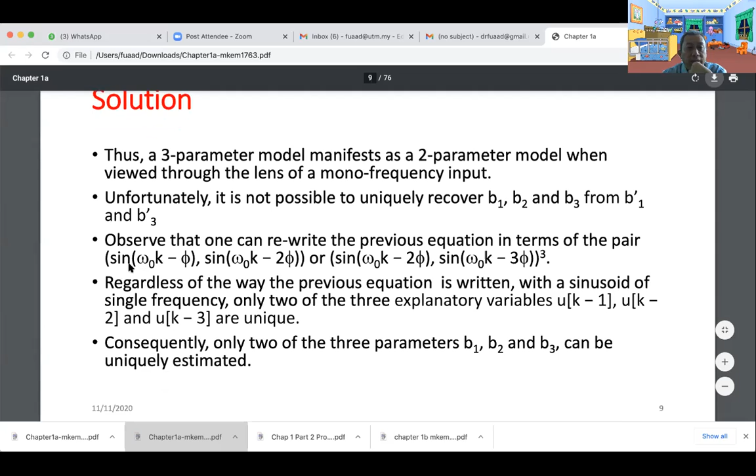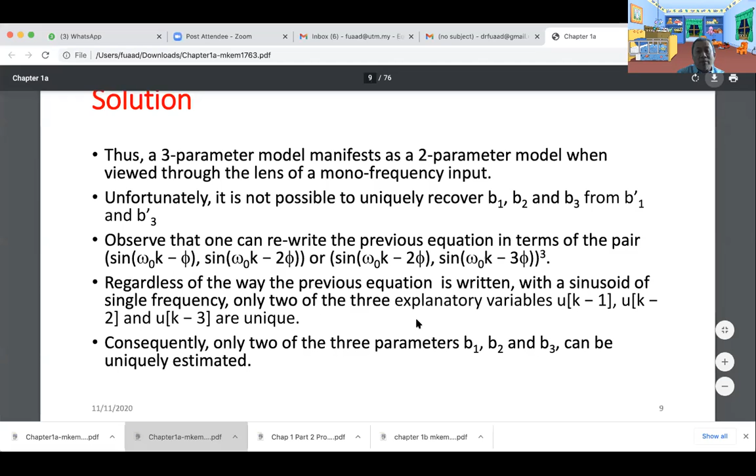So we can rewrite the equation in terms of sine(omega naught k) and sine(omega naught (k-2)), or we can replace it with sine(omega naught (k-2)) and sine(omega naught (k-3)). Either one can do, because we can manipulate the mathematical equations of the system and then estimate the parameters B1, B2, and B3. For further details, you can refer to example 2 in book chapter 1, part 2.

So I would like to draw your attention to one of the important issues in system ID. We're still in chapter 1, which is the signal to noise ratio. SNR is very important for the user, for the designer, for the student, research student, when they are doing a real experiment to collect data.

So the formula for SNR is given by variance of signals divided by variance of noise. It is the relative contribution of deterministic excitations and random variations, quantified as a single formula, SNR. The term signal here refers to the true response that you get from the system, and having a good SNR is critical and very vital, because it will affect the reliable parameters that we're going to estimate, and particularly the estimation method that we are going to apply.

So it's a very simple formula, whether it is high or low. Since this is a ratio between the signal and noise, the numerator, the upper part, must be as high as possible, and the lower part must be as low as possible. So when you get 10 volts on the signal and the noise is 1 volt, 10 divided by 1, the signal to noise ratio is 10, so it's considered very good.

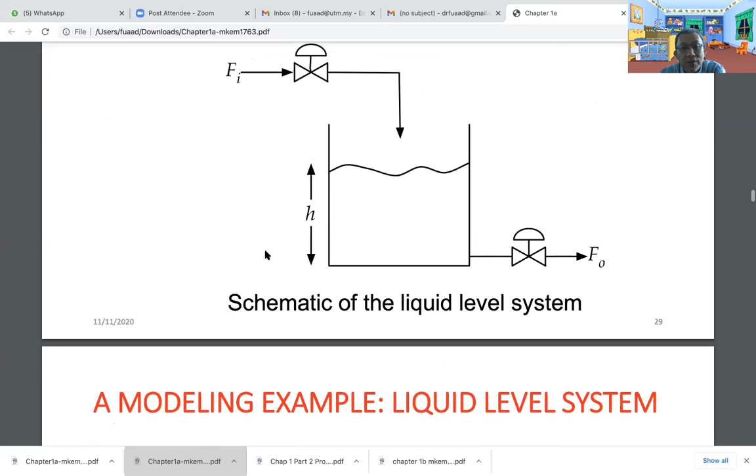Okay. So from this diagram, okay, we totally know that this is a simple first order system, because it's a single tank. If the system is two tanks or coupled tanks, then it is a second order system. Okay, this is what we call prior knowledge. Right. So in this modeling example of the liquid level system, we will see the physical process. We will see data generation. We will see data visualization and preliminary analysis.

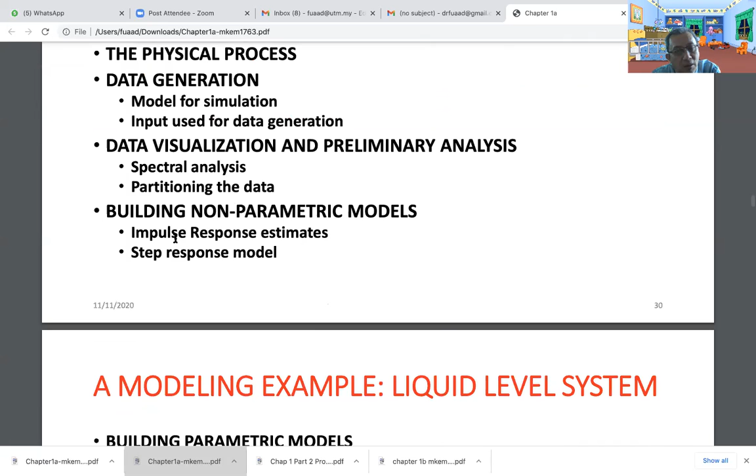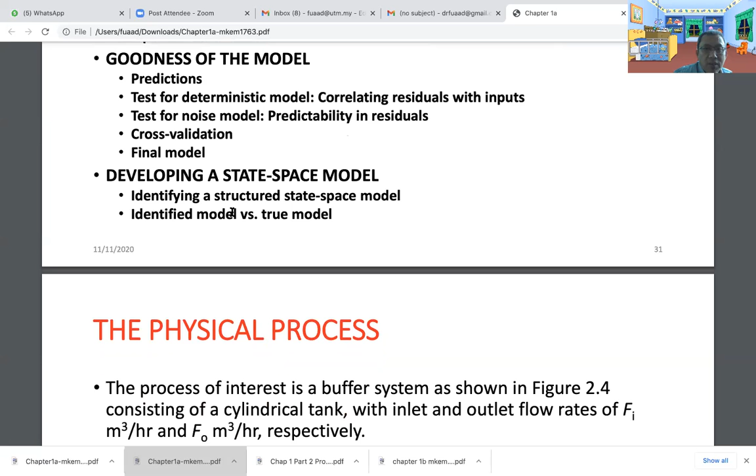We will see how to build non-parametric models, and we will see how to build parametric models. In this case, we are using the output error and the equation error. And then we are going to see how good the model is. We call it the goodness of the models. We're going to see the predictions, deterministic tests, noise model tests, and so on. And then try to see another model besides the transfer function, which is a state space model.

So you can see here, this is the physical process, okay, of interest. We have a buffer system shown in figure 2.4 here, okay. So Fi is the input flow rate, in meters cubed per hour, and the output here is in meters cubed per hour as well. So the objective is to build a model that explains changes in level H with respect to changes in inlet flow rate Fi. So the end use of this model could be in simulation, control, and monitoring of the liquid level system.

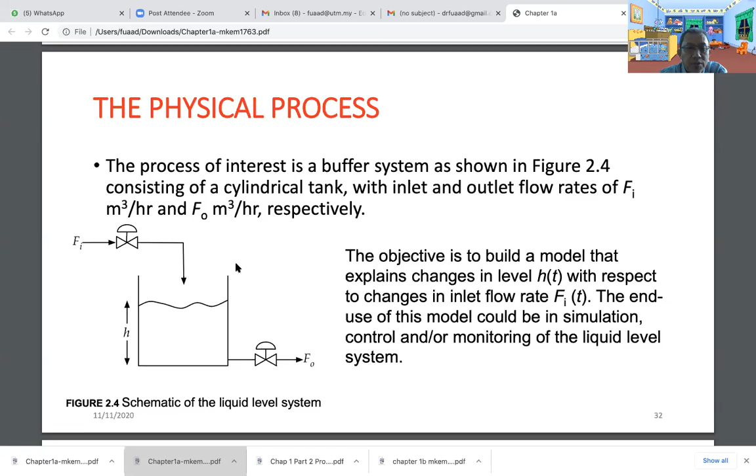So how to generate data? In order to generate data, we have two types. One is via experiment. The second one is by simulation. So first of all, we have to find the first principles model, which is by derivation. So for a single tank, the deterministic first principles model of the liquid level system based on conservation of mass is given by dH/dt, where we differentiate the height of the liquid, plus 1 over Ac multiplied by Cv square root of H(t), equal to 1 over Ac multiplied by Fi.

Okay, with the assumptions. Number one, incompressible fluid. And number two, the outlet flow rate being proportional to the square root of the pressure head, which is the valve equation, F naught equal to Cv square root of H(t). So what is Cv? Cv is the valve coefficient. Every valve has its coefficient, so you have to look at the spec of the hardware. The valve coefficient of the outlet is Cv, and Ac is the cross-section area of the cylindrical tank.

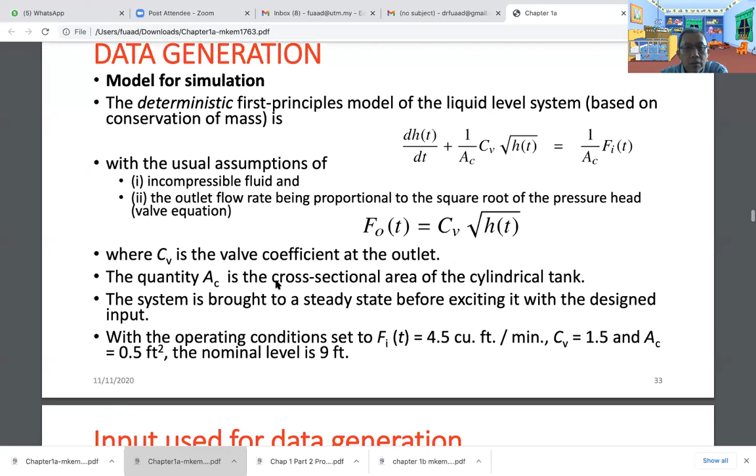So the system is brought to a steady state before exciting it with the design input. The operating condition is set to Fi equal to 4.5 cubic feet per minute, CV is 1.5, and AC is 0.5 square feet. So the nominal level is equal to 9 feet.

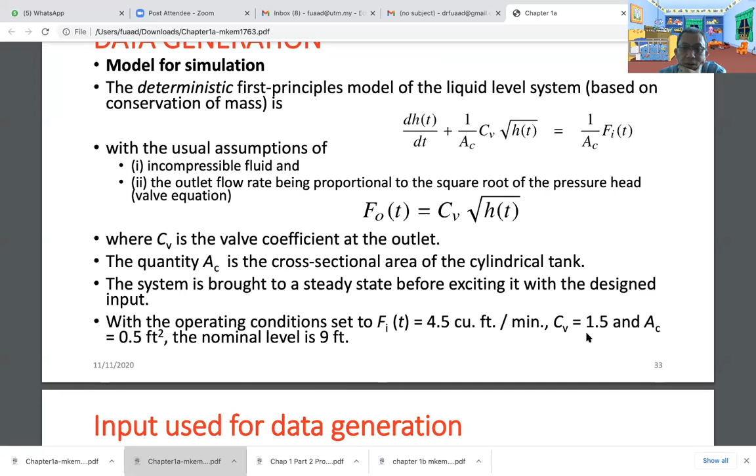You can see that CV here is the valve coefficient. This one we will get from the spec of the valve that we buy. Right, so that is the hardware, the process. Okay, so now is the input that we use for data generation.

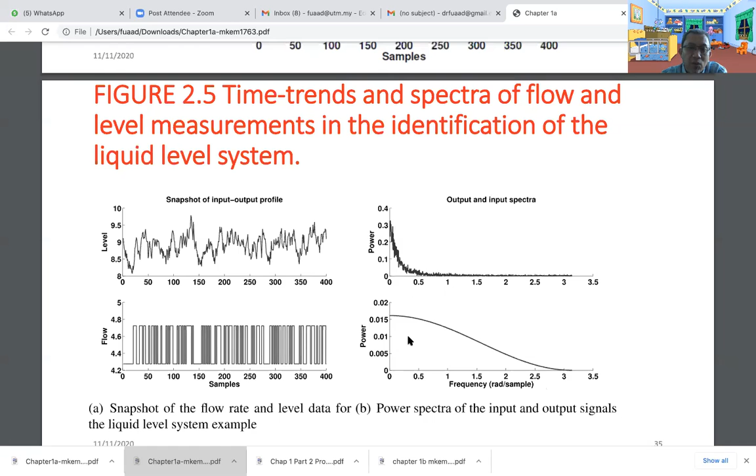So the response of the sampled data, from the equipment that we're going to sample, which we call a ZOH, zero-order hold, or process sampler, is obtained by numerically integrating the nonlinear ordinary differential equation here. So we manipulate this equation: dH/dt plus 1 over AC times CV square root of H(t) equals 1 over AC times Fi.

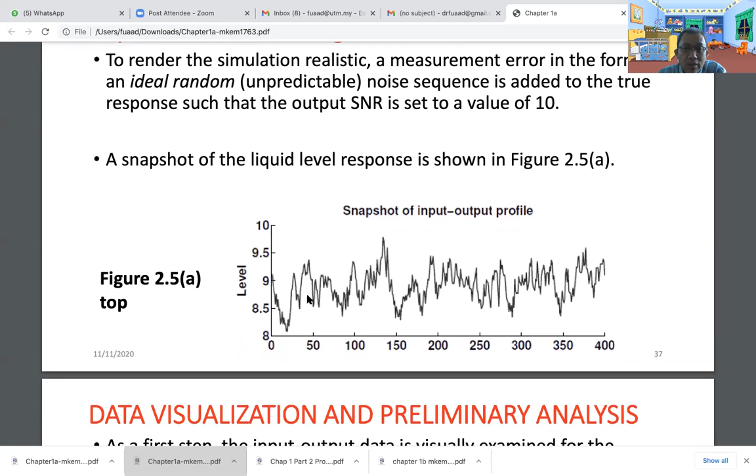And to make the system realistic in simulation, we add some unpredictable noise to the system. To render the simulation realistic, a measurement error in the form of an ideal random or unpredictable noise sequence is added to the true response with the SNR set to 10. So we can see the snapshot here, similar to the figure that I showed before.

So the input-output data is visually examined for the presence of any drift, outliers, and so on. We can see here there is no drift. Drift is related to the age of the equipment that we use. If the equipment is too old, it might contribute to drift in the data, which must be removed, must be deleted from the data.

And outliers are something similar to drift: the data taken is not logical, it's out of the expected tolerance that we allow. So we must delete this data as well. So at the end of the day, we get this.

You can see that some data pre-processing is needed, because this is the input and this is the output. In the output, we added some random, unpredictable signals. So we need some data pre-processing.

So from the data, you can see that steady state cannot be determined experimentally before introducing changes to the input, okay? Because such performance is based on the alternative method, which is using the average reading as the nominal operating point. So therefore, we apply a simple mean centering operation of the input and output data to generate the required deviation variables.

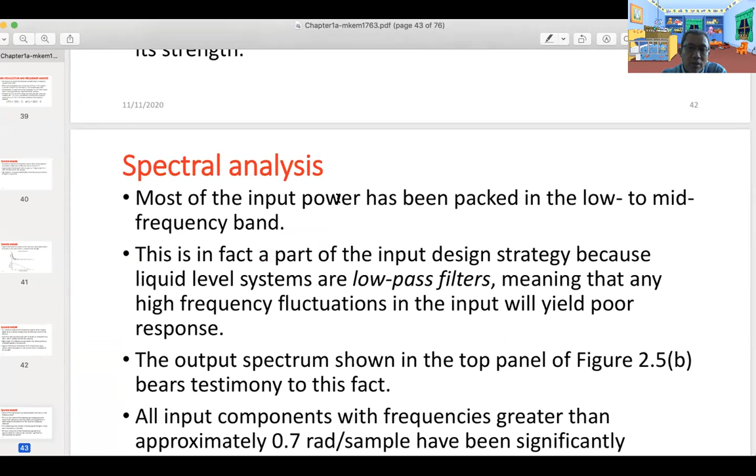So the liquid level system shown in the figure before, a single tank, is considered a low pass filter, meaning that any high frequency fluctuations in the input will yield a poor response. So it only uses the low frequency. The output spectrum in figure 2.5b shows this point, where all input components with frequency greater than 0.7 radian per sample have been significantly attenuated by the system. After 0.7 it is flattened, so it's a very low frequency between 0 and 0.6.

So partition the data. Once you get the samples of data, we have to partition it. Let's say you have a length of data of 3,000 samples captured for the input and output of the single tank system. From there, you have to divide it into two sets: the first 1,500 for the identification model, and the remaining 1,500 for the validation model. So that is the practice.

So in this case, we have 3,000 data. The first 1,500 is for identifying the model, and the remaining 1,500 will be applied to validate that the model we obtain fits 90% and above. We will apply this in chapter 5 during the case study. Both data are expressed in terms of deviation variables with the nominal operating point determined from the training data. In the following steps we are going to see how we partition the data.

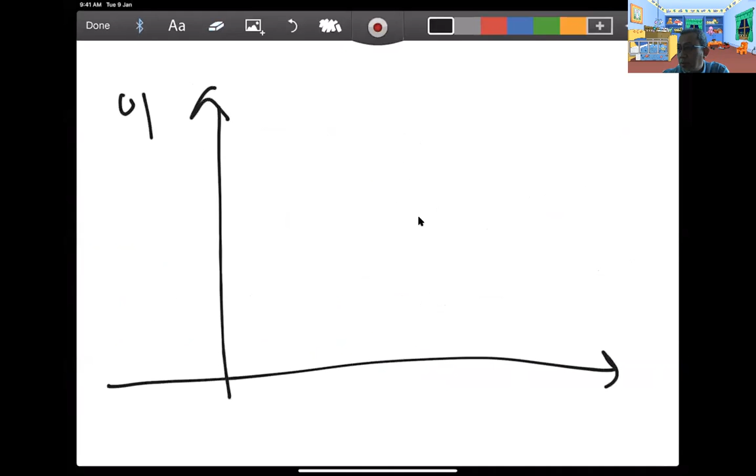Maybe you can't see what the time delay is, so let me share with you. Time delay is something like this. This is the output, and you have the signals here. Sorry, this is not input, this is time. Okay, this is time, this is the input, and this is the output.

So from here, you can see that there is a time delay here, a time delay that must be included in the particular model of the system.

And then the gain is the final change in the output to a unit change in the step input. So the step response coefficient is ideally suited for estimating gain. The time delay we use impulse response, gain we use a step response, and then you want to see the time constants of the system, whether the system has a time constant or not. So this is referred to the 63% of the final value.

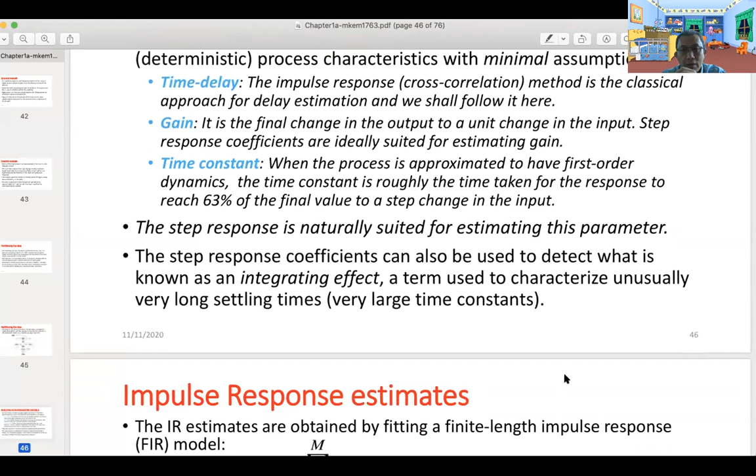So the response is naturally suited for estimating this parameter. We call it the first test, the first step before we inject the real test signals of PRBS to the system. So this is some impulse response estimation. We are using the formula here.

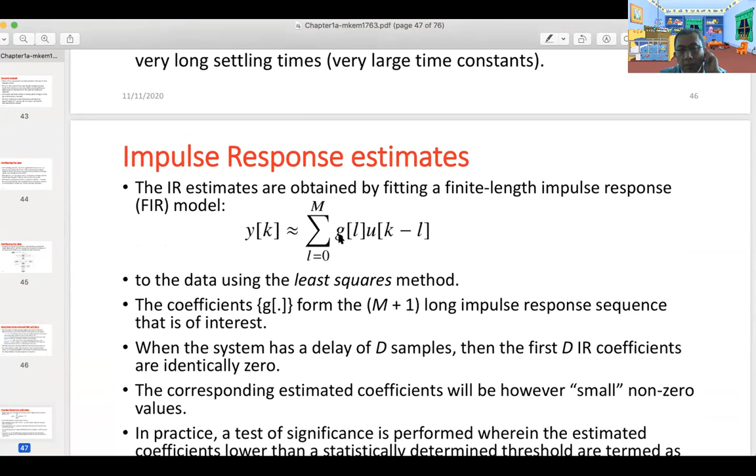Y(k) is equal to the summation of G multiplied by U. U is the input, the impulse, G is the system. So we begin with L equal to 0 until M, maybe it's 100 or 1000. By using least squares on the data, we can collect the data and then we plot. So this is the sample of the impulse response plot.

So physically there is no delay between the flow and level; in the continuous time system there is zero delay. But in the sampled data system, the presence of the delay is due to the zero-order hold of the sampler. So this decaying nature of the impulse response estimate is a clear indication that the sampled data system is stable, which agrees very well with the knowledge of the process.

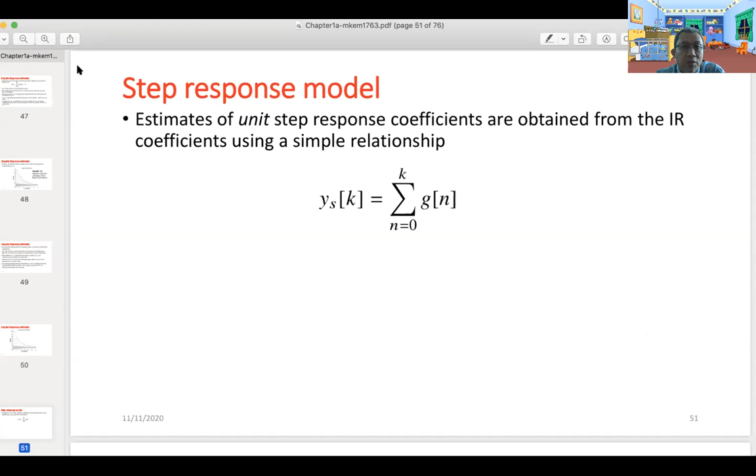And then we can also use the step response by using this formula. Mathematically it is taken from the impulse response, but we modify it. Y is the output, G is the system. So we inject the system, then we obtain the response that's similar to the drawing that I drew on the iPad. So you can see that this is a first order system because our tank is a single tank.

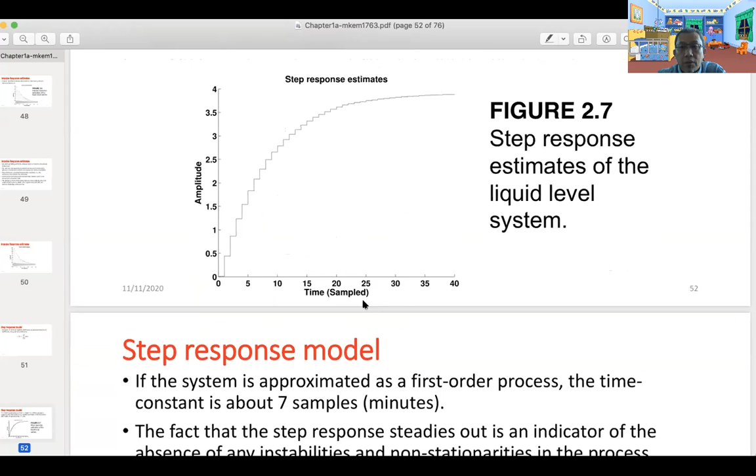So it is a first order system, which strongly suggests first order, or an overdamped higher order if the second order is overdamped, dynamics with a gain of approximately 3.7 units. So if the system is approximated as a first order process, the time constant is about 7 samples. The steady state value is 4; 63% of 4, you can calculate, is around here. If I annotate here, it's about 7. This is the 63% of the output, which gives you the time constant of about 7 samples.

So how to build a parametric model? The parametric model will be discussed in detail in chapter 3 because it's very complicated. So I just give a few simple samples for you to digest, because we are in the journey of identification in chapter 1. It uses a difference equation, DE. It's not a differential equation. A differential equation uses the S domain. A difference equation uses the discrete domain to model the deterministic process for the given data.

Okay, so it's suitable for guessing the delay and the order of the difference equation form compared to the transfer function in continuous form. So we have an equation here, x(k) is equal to a1 x(k-1) plus b1 u(k-1). Okay, so this is what I call an observed discrete-time deterministic process. If you don't understand it, don't worry, because in chapter 3 we will go into details.

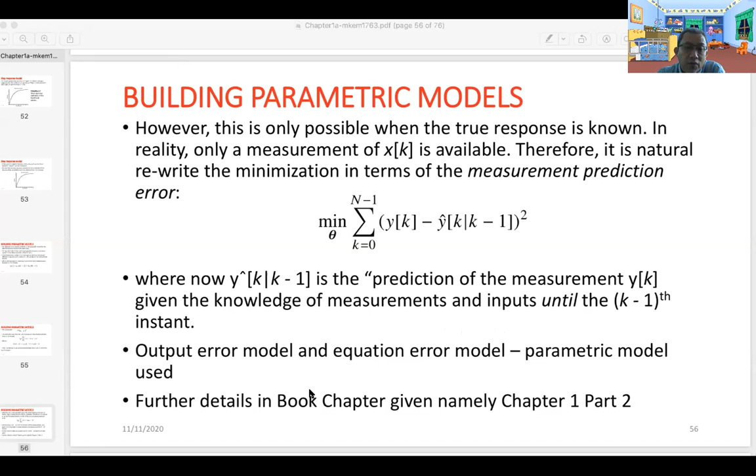So we can apply this in the output error model and equation error model, which are types of parametric model. There are many parametric models: ARX, ARMAX, AR model, MA model, output error model, and equation error model, which will be described in detail in chapter 3. But for the readings, you can read the book chapter given in chapter 1, part 2.

So after you get the parametric model, we want to know whether the model is good or not. So we use the prediction error, also known as the residual. The residual is the difference between the real output y and the estimated output, y hat. This is the key quantity of interest in assessing the goodness of the models.

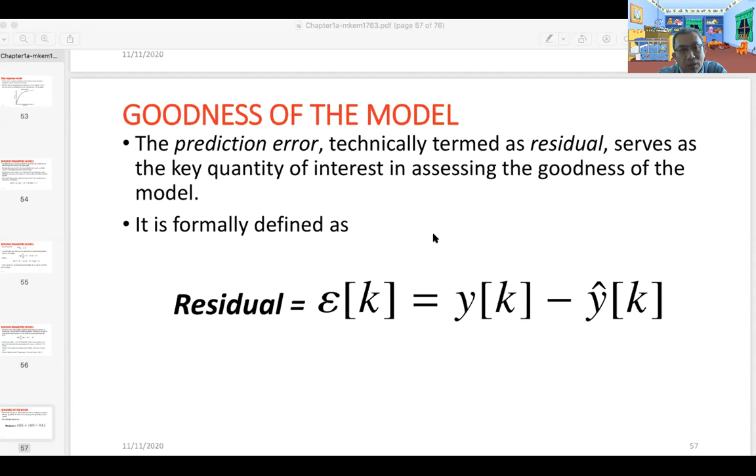A good model should not leave behind residuals that offer further scope for prediction, while avoiding overfitting. So consequently: residuals cannot be explained by the input, residuals cannot be predicted using their own past, and the errors in the parameter estimates are small or negligible relative to the estimates themselves. This is the test for over-parameterization.

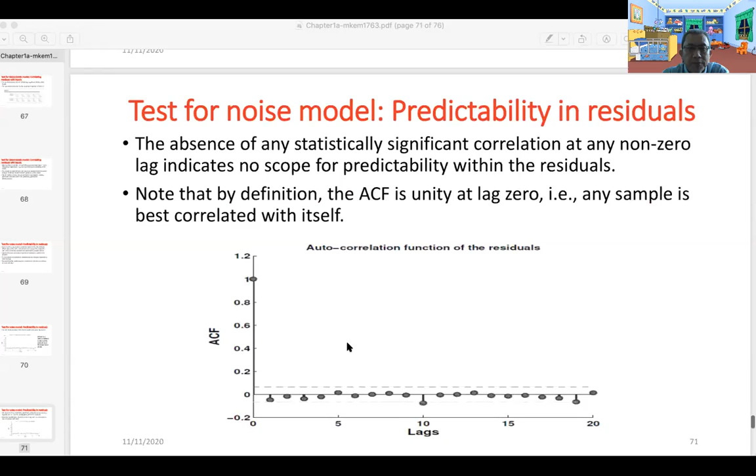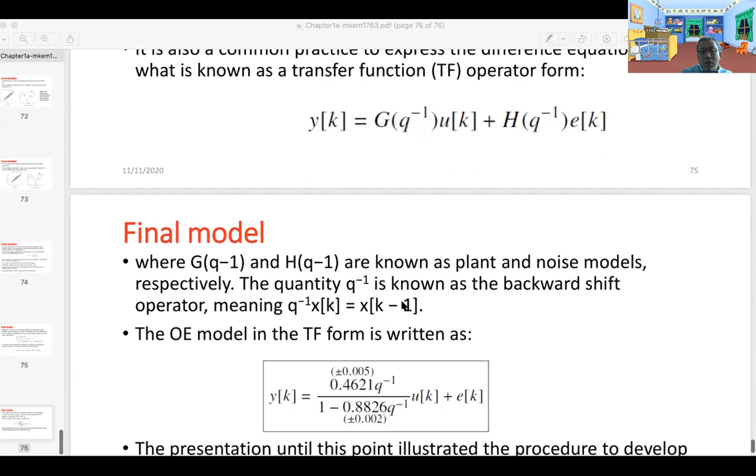So it is also a common practice to express this difference equation in what is known as a transfer function operator form. In transfer function operator form, you can write it as here, 0.4621 q^-1. q^-1 is equal to z^-1; some books use q, some books use z. So this is the mathematical model of the single tank which we studied before.

We are looking at how to obtain it, the journey. The journey ended here at the final model. It started with the schematic single tank. Then we put in an input impulse, input step, then the parametric model. There's a non-parametric model. Then we analyze it, and at the end of the day, this is the final model that represents the single tank process control system.

To obtain this, this one is more in chapter 4, where we have to use the least squares estimate, the prediction error method and other methods in order to estimate the parameter values of A1 and B1. Any questions so far from the floor, before we go to chapter 1B, the last one for today?

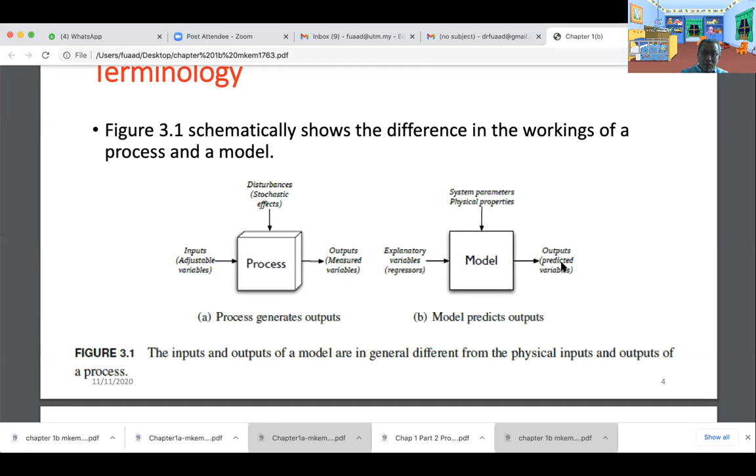So to highlight that, the model input is a broader set compared to the process. It consists of the past and present inputs to the process and all other variables that participate in the predictions of the output of interest. An important part of the model is you cannot forget the set of underlying assumptions. There must be assumptions. If there are no assumptions, our experiment will be difficult to accept the data.

A popular class of description known as a state space model uses, in addition, a set of variables known as states to describe the process. That is considered another part of the model, known as the state space model, which consists of matrix A, matrix B, matrix C, and matrix D, which is the feed-forward matrix.

So in order to classify the model, we may ask several questions. Do we wish to model the steady-state behavior or the transient dynamic behavior? Do the process variables depend on directions other than time? Those are the questions we must ask. Then, does the process of interest possess purely random behavior? What kind of input and output relation do we have and desire?

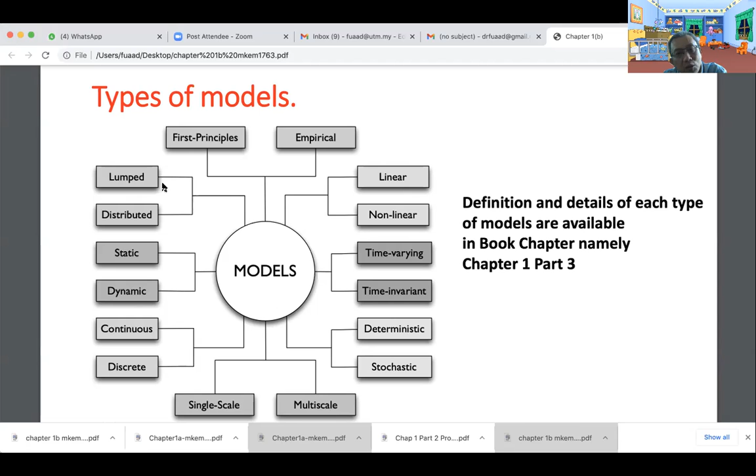Whether this is lumped or distributed. Some of the system is lumped together; all the subsections are lumped together, compared to distributed, where we cluster into the simple one. That one you call a distributed model. So that's why it can be classified as an approach to modeling. Approach to modeling is first principle versus empirical, or system characteristic. This involves linear and non-linear, time varying or time invariant.

Or it can be classified by the knowledge available to the user, which is deterministic or stochastic, whether it's a black box, a gray box, or white box. Or by the domain of modeling, which is continuous and discrete time, or time or frequency domain. Or by response characteristic, which is static, dynamic, or lumped or distributed.

So as I told you before in chapter 1, there are advantages using first principles and empirical models. Both can be used, both can be applied, both have a pro, both have a con. So both will do. And usually for the empirical models, we focus on 4 main things, whether it's non-parametric or parametric. Non-parametric usually uses impulse response, step response, frequency response, and power spectrum density. A lot of graphical information from there.

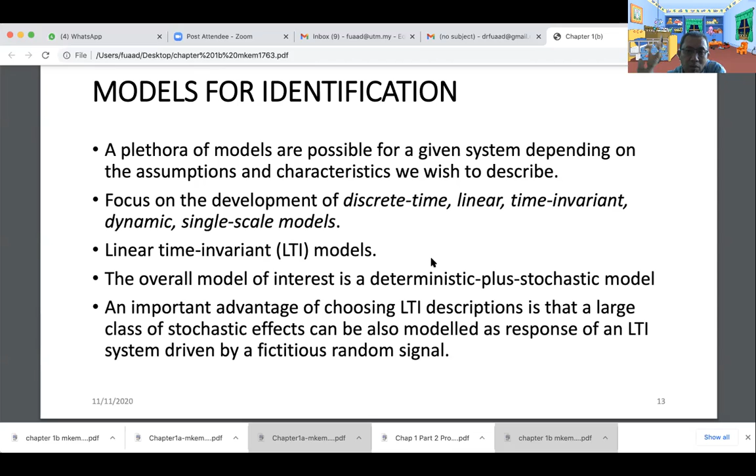So I wrap up again. I gave you 3 slides, chapter 1, chapter 1A, and chapter 1B, and book chapters, chapter 1 part 1, part 2, and part 3. This is all the material that I use, including my slides for chapter 1, system ID introduction, and some journals and some model specifications. I hope the materials will help you in order to understand the chapter 1 lecture. With this I end my lecture today.